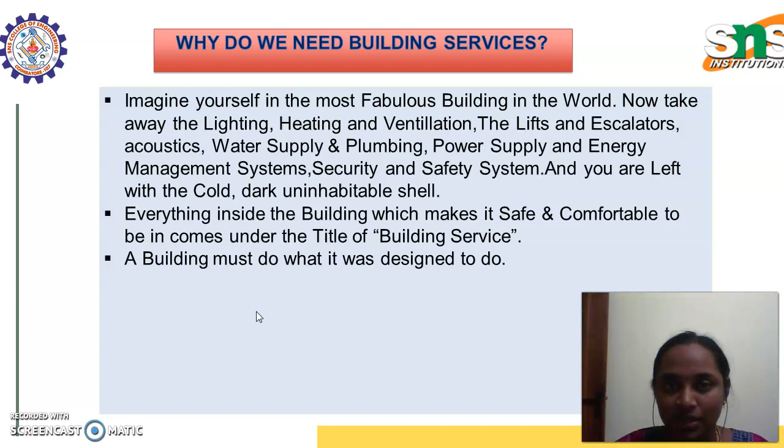Next is building services, or what makes a building come to life. What is the life of a building? All these things come under the life of a building: energy supply, gas, electricity and renewable sources; heating and air conditioning is also very essential; and water drainage and plumbing is very essential, since people living in the building will need water as well as plumbing and drainage for used water, and natural and artificial lighting.

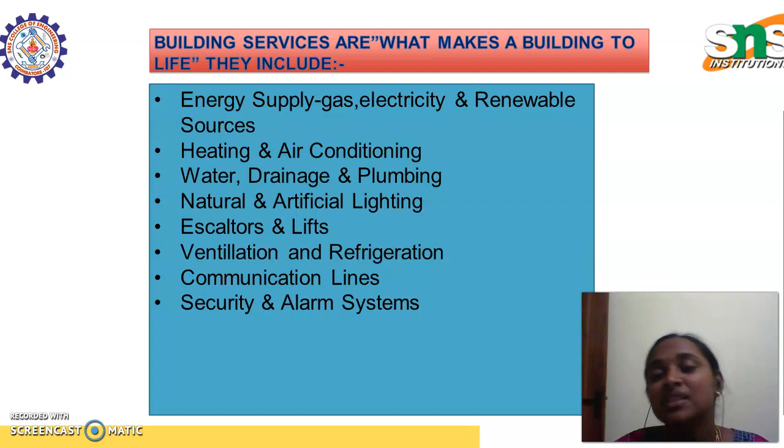If a building is constructed, it should not only have electricity light but also natural light, so sunlight rays get inside the building - the building has to be constructed like that. Escalators and lifts provide a safe and comfortable environment. Ventilation and refrigeration are also very necessary in a building. Communication lines means plumbing lines as well as electricity lines, and security and alarm systems are also very essential. These are the things which give a building its life.

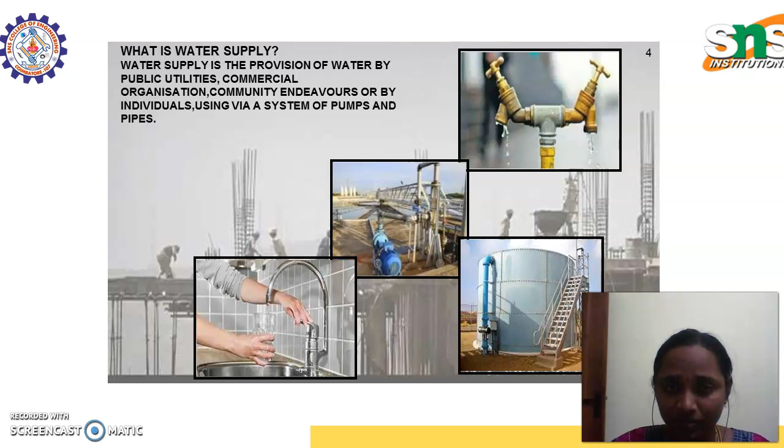First comes the water supply. We know that in a building, if a person is living, they are in need of water for everything - for cooking, for cleaning, for bathing, for washing utensils, for washing clothes, etc. So it is very essential. Water supply is the provision of water by public utilities, commercial organizations, and community endeavors. It is very essential to provide water supply throughout the building with the help of the plumbing system.

Next, a brief explanation about plumbing. Many fixtures and fittings are to be connected in the building for this plumbing system. There are different types of plumbing systems: gravity and pumping system. In the gravity system, water flows under gravity, while in the pumping system, water is pumped with the help of centrifugal or reciprocating pumps.

There's also the dead-end system, which consists of mainline, branches, etc. The radial system is where water is allowed in at one end and diverted to multiple ends. Likewise, gridiron system and ring system are also followed. In high-rise buildings, we mainly use the pumping system.

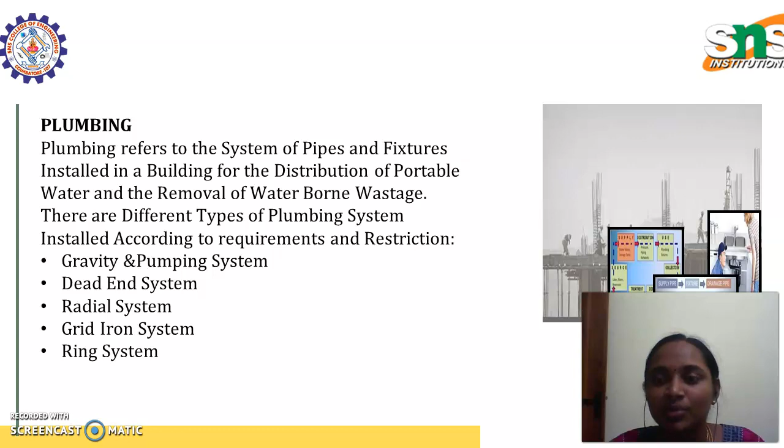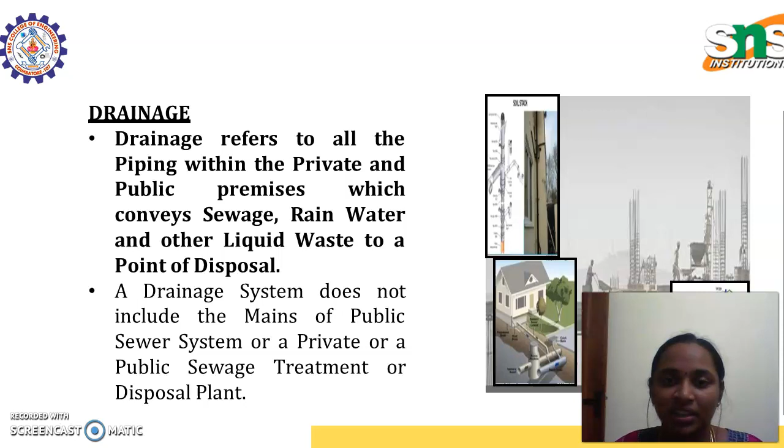Next comes the drainage system. In a restaurant, for example, there is hand washing water and dish washing and utensil washing water. This water has to be drained properly in order to have a clean environment, so drainage is very essential. Drainage refers to all the piping within private and public premises which conveys sewage, rainwater, and other liquid waste to a point of disposal.

Next is some of the general rules for water supply, drainage, and sanitation of each building. If we are providing a water supply system, water should be essential for the persons using the building. The water supply system should be provided in every area of the building wherever water is required, for example in kitchen, bathroom, and dining hall, and an outside tap is also essential for using washing machines, etc.

Now coming to the drainage system rules. If excess water is being used by people, or if excess water overflows in the tank, it should be drained properly in order to avoid water logging in and around the building and backflow. If water is overlogged without draining, there will be a hazard in and around the building.

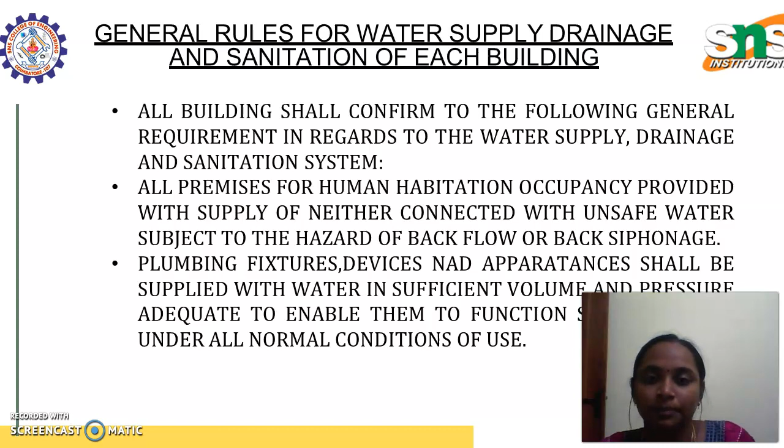Plumbing should be designed and adjusted to use the minimal. If we are providing any plumbing system, it should be provided with quality as well as the minimum quantity of water consistent to be provided.

Next, devices for heating and storing water shall be so designed and installed as to prevent dangers from explosion through overheating. Every building having plumbing fixtures installed and intended for human habitation, occupancy, or use on premises abutting on a street, alley, or easement in which there is a public sewer shall have connection with the sewer.

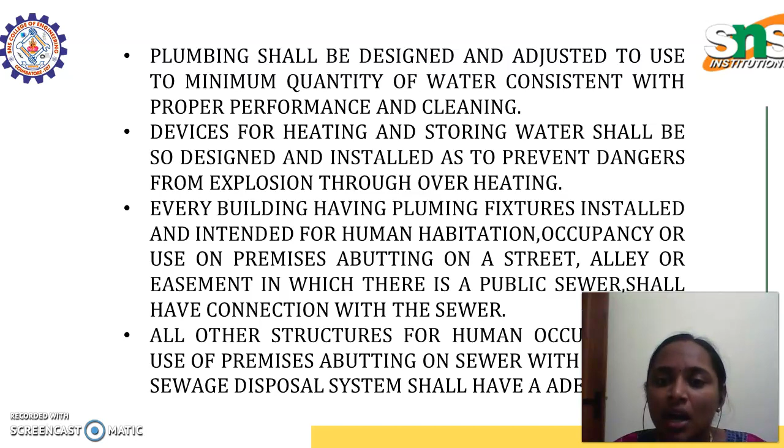Likewise, some rules and regulations have been given: all other structures for human occupancy or use of premises abutting on a sewer with a private sewage disposal system shall have an adequate water supply to the building.

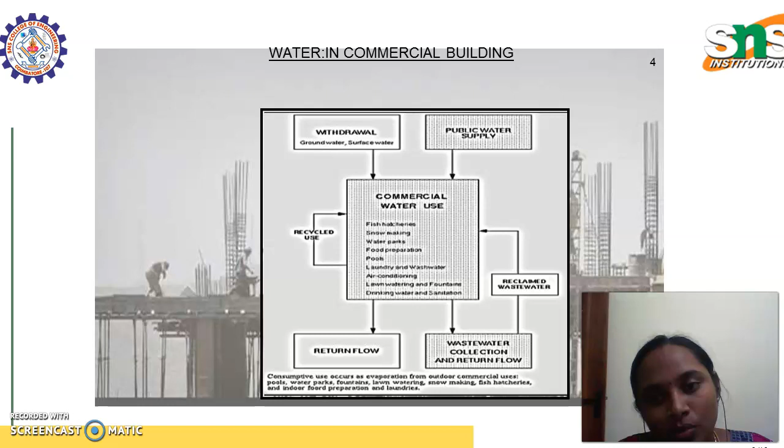Next, for water in commercial buildings, withdrawal of water should be from groundwater and surface water, and public water supply. Commercial water uses include snow making, water for food preparation, pools, laundry and wash water, air conditioning, and many other purposes in the building. All this used water can be recycled, and return flow is also available.

Next is a restaurant. In a restaurant, if proper sanitation, water supply, and drainage systems are provided, it serves and prepares food and brings it to customers very easily, and also generates more revenue.

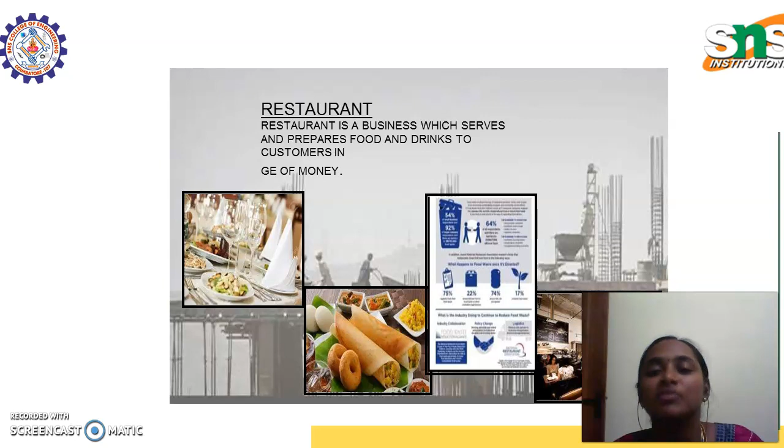Some areas of water usage in restaurants are water-using appliances such as water heaters, coffee and tea stations, steamers, ice machines, drinking water, and kitchens - all these areas require more usage of water in restaurants.

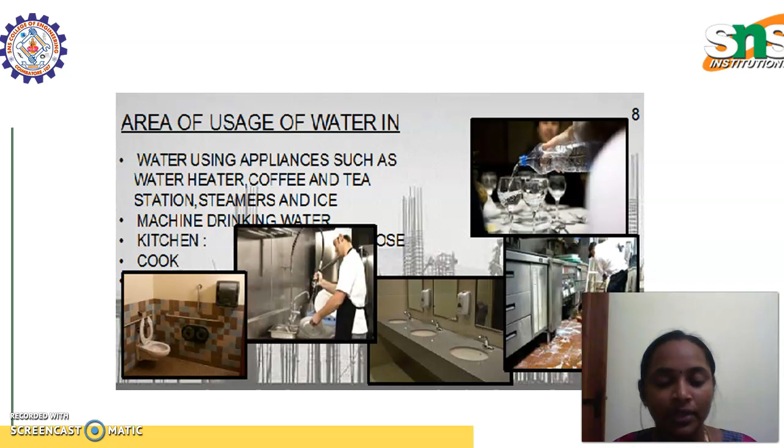The water supply system in a restaurant is plumbing which provides and distributes water to different parts of the building or structure for purposes such as drinking, cleaning, washing utensils, washing clothes, and using washing machines, etc., along with equipment and other appurtenances. There are two types of water supply systems required in a restaurant.

One is the cold water supply system and the other is the hot water supply system. In the cold water supply system, customers coming to the restaurant may require cold water. The hot water supply system is used if we are preparing coffee or using hot water for cooking purposes in the kitchen - we can use the hot water supply system readily with the help of this hot water supply system.

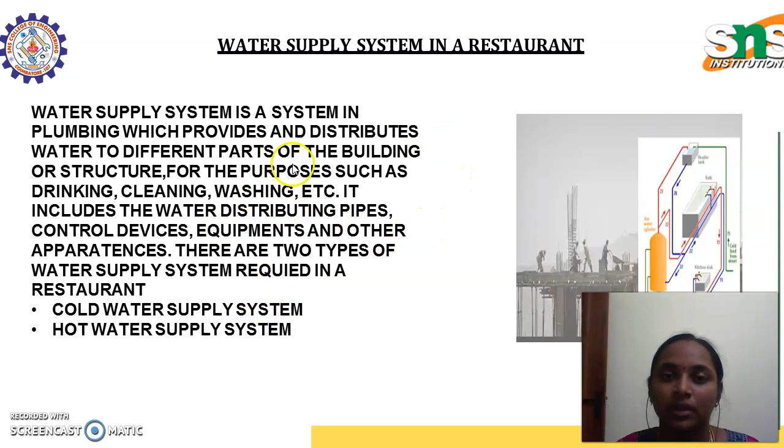So these are some of the points from this case study which we discussed today in a restaurant. Thank you.